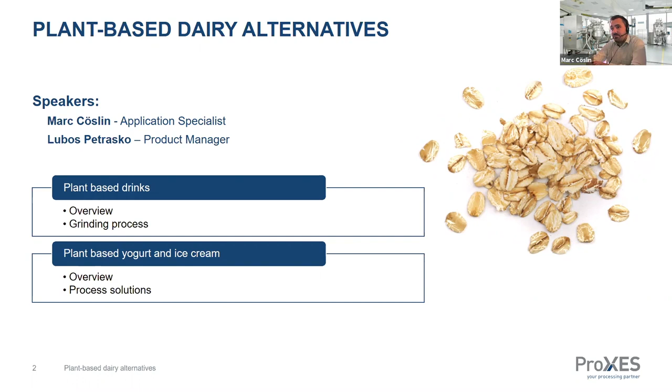Thank you, Marc. So for today we have focus on two main topics: plant-based drinks, plant-based yogurt and ice cream. We'll talk about raw materials, the difference between animal-based and plant-based products, the way the raw materials can be processed and pre-processed, what the differences between individual materials are, and what their impact on the whole process is. And then we go through more complex processes of how to produce the milk, yogurt, ice cream, and show you where our technology can support you by your products.

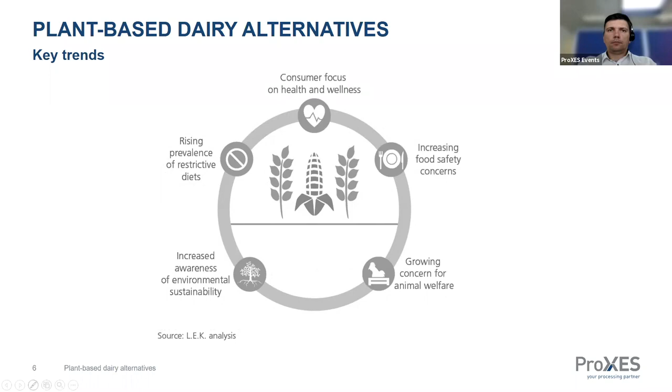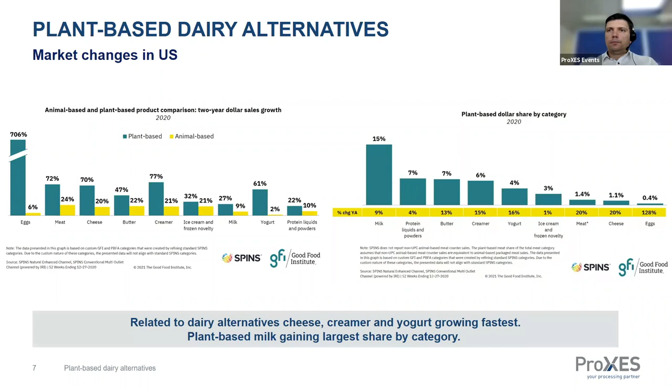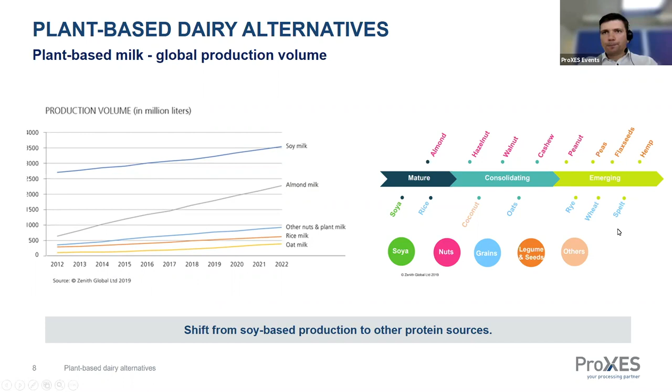So let's look at how the situation is among your customers, or based on your experience. I would like to give you the second poll question: which protein source has the highest demand in your field? You should see on your screens a choice of 10 different protein sources - feel free to take multiple, choosing as many as you consider being of highest demand.

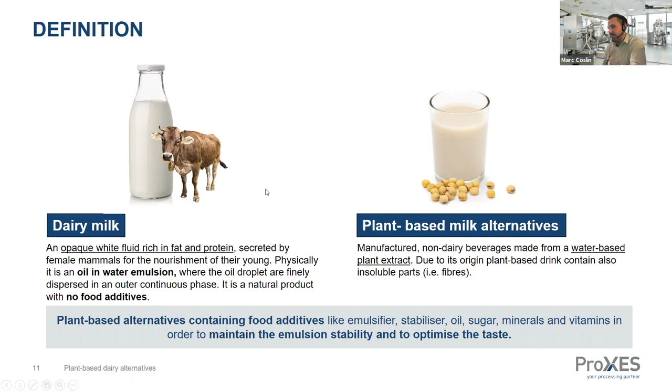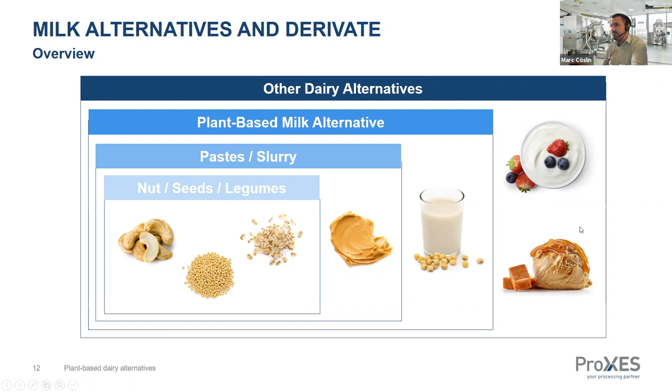Finally, there are also other dairy alternatives which are using the milk as a base in order to get a structure, as you know, like a yogurt, for example, a fermented product, or an ice cream. This my colleague Lubos Petrasko already discussed with you.

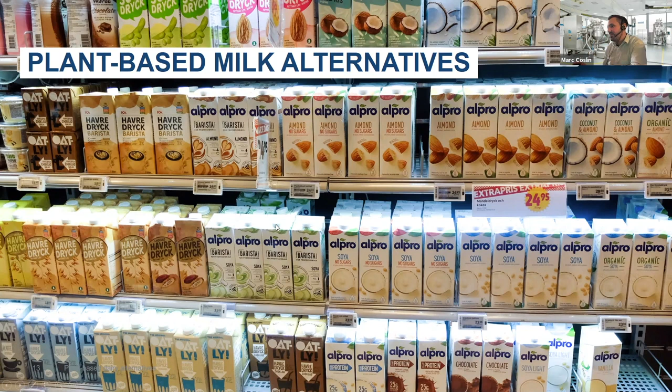So we have different brands, we have different sources - we have soy, we have almond. You can see on the right side even a mixture between coconut and almond. So there's a huge range, and it's still growing.

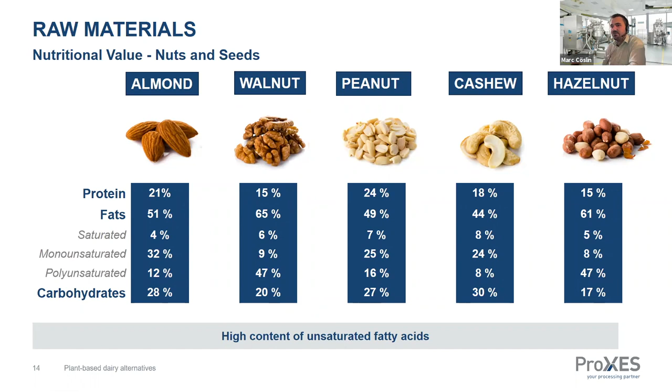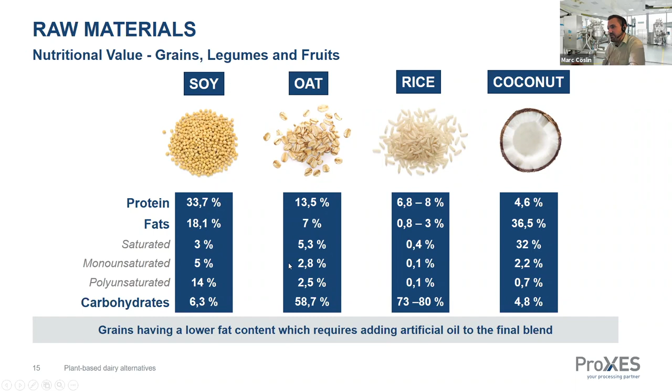And this is mainly fiber and starch, and this is also something to regard in terms of processing. We will also go later on more in detail - it's about starch network building during processing and how to avoid it.

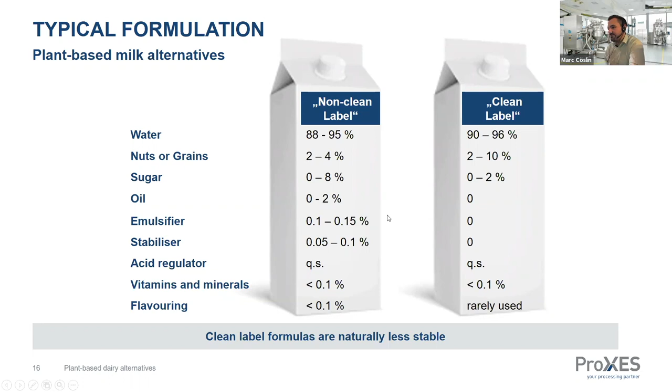formulation developer or recipe developer - we are a machine manufacturer. We can support you to find the optimum process, and these guys here can help you to develop the recipe.

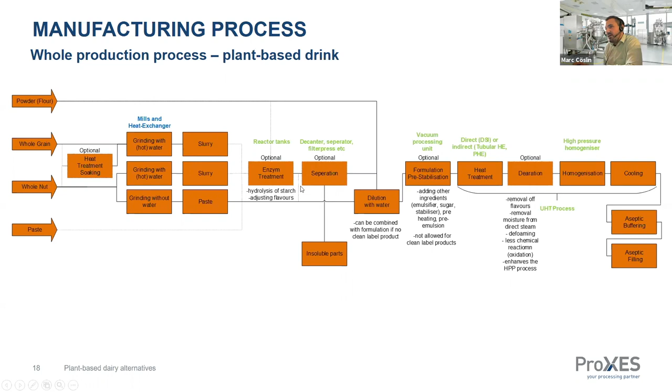We have an interesting thing, a side stream here in the soy industry called Okara. Okara consists of the fibers and insoluble parts which were not ground or did not go into solution from the slurries, but it has a quite good or substantial amount of proteins and valuable micronutrients. So it's a quite good protein source, and a lot of customers are unfortunately throwing this Okara away, while some customers use it for animal food. But there's also investigation into the need to further process it. We also experienced with some other projects that customers are willing to process this further into other sources.

Usually it will be homogenized or ground, then go through filtration steps and further drying steps, and you can create, for example, a protein powder out of it, which can be used for other alternatives or sold to other companies.

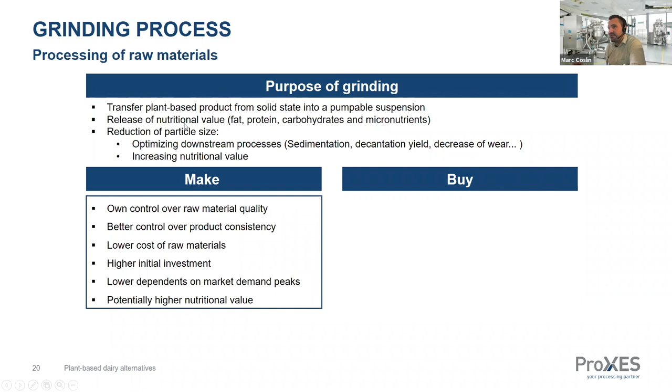The purpose of grinding is to transfer the plant-based product from solid into a pumpable suspension, and to release the nutritional values as fat, protein, and carbohydrates, and also the micronutrients. The reduction of particle size also has a significant influence on the downstream process, it can increase the decantation yield, for example. If we step one slide back, you can see in the separation you always lose some good and valuable proteins, fibers, or micronutrients. If you have an optimized grinding on this end, you would be able to have a quite valuable product and higher nutrients at the end.

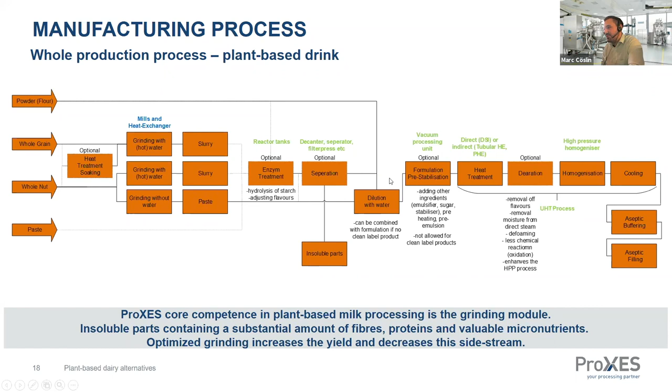For sure, there are lower costs of raw materials already mentioned. It is a higher investment for sure, since a grinding module has to be purchased. And we have a higher nutritional value compared to flour, for example, because flour is also a pre-processed powder which already experienced heat treatments. This would mean you would need to add more artificial micronutrients, for example, to your milk, instead of doing the paste from the grain or the nut.

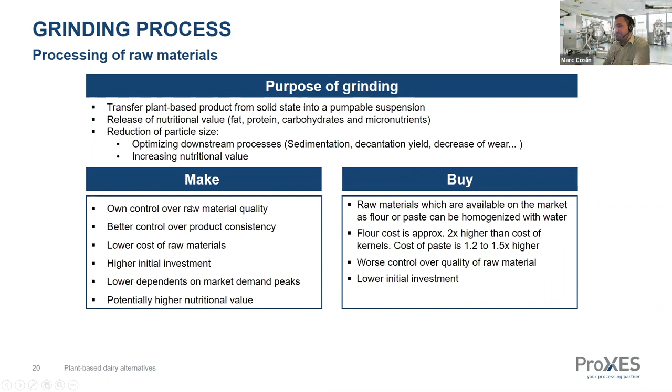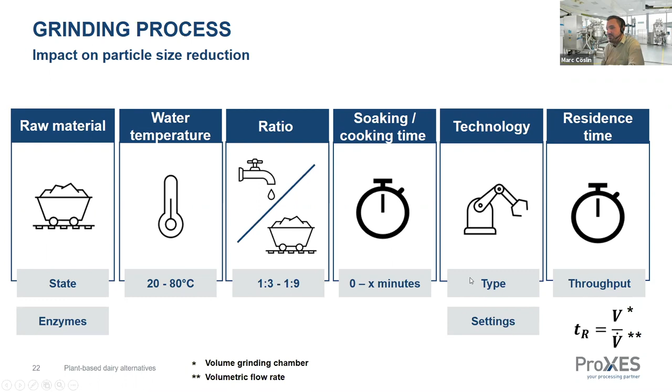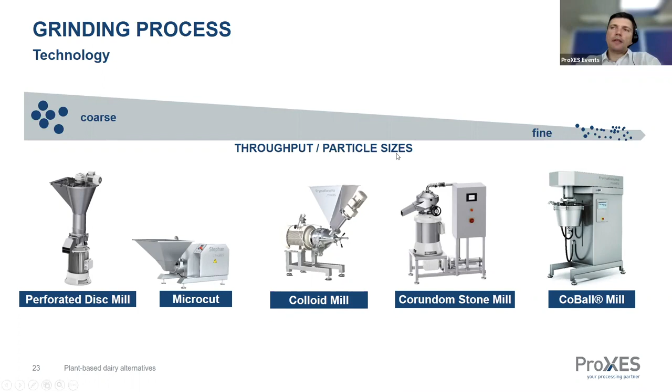By a rule, with increased reduction, the throughput of the machines goes down. That is portrayed here above each technology. So when we perform coarser grinding, the throughputs are higher, and then with reduction being stronger and leading to finer particles, the throughputs of the machines go down.

Marc mentioned the technology, so individual mills can be used in single or multiple step grinding. It's important to make the right choice in relation to application, especially which is the optimal first grinding step, optimal second grinding step, and to configure the technologies to perform at the best rate.

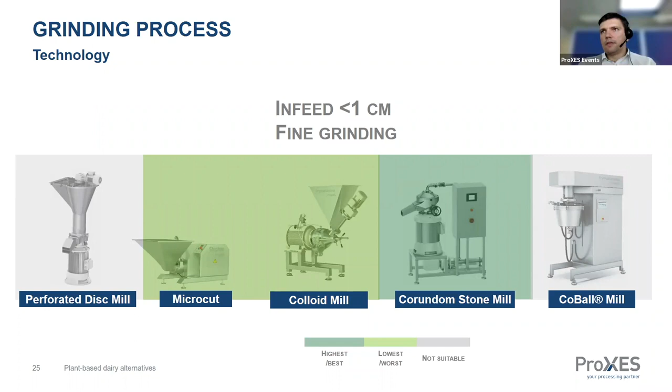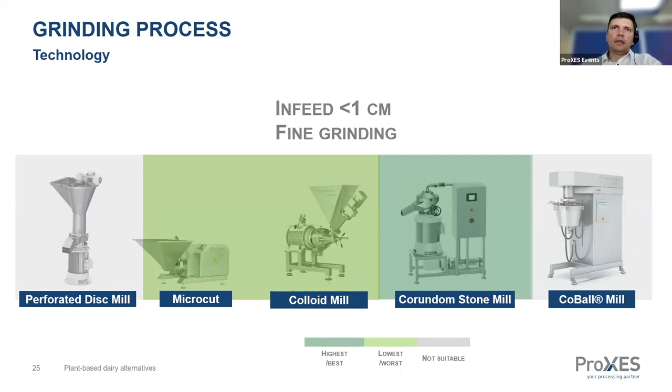The second situation is you have already pre-cut or slightly pre-processed product, which contains particles up to 1 centimeter maximum. We would refer to it as fine grinding, and for such a size, corundum stone mill can deliver the best performance. But if you already have microcut or colloid mill in the process, these 2 technologies are almost equally suitable. The bead mill, similar as before, can't handle such an initial size, and the perforated disc would not deliver optimal performance.

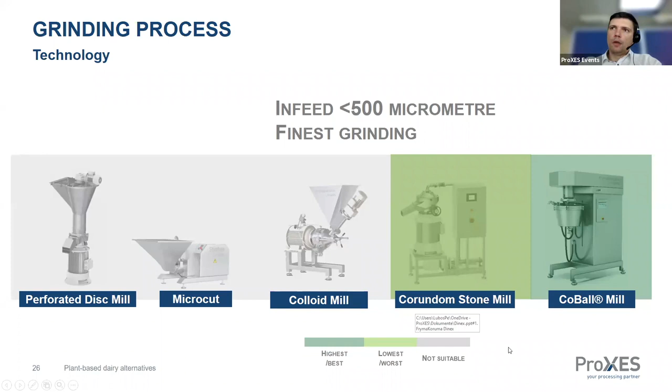To summarize this part, the choice of technology depends mainly on the application. Further factors, also mentioned by Marc, are the throughput required and the desired final particle size, which then determine which technology to go with and potentially which combinations of grinders or mills to choose.

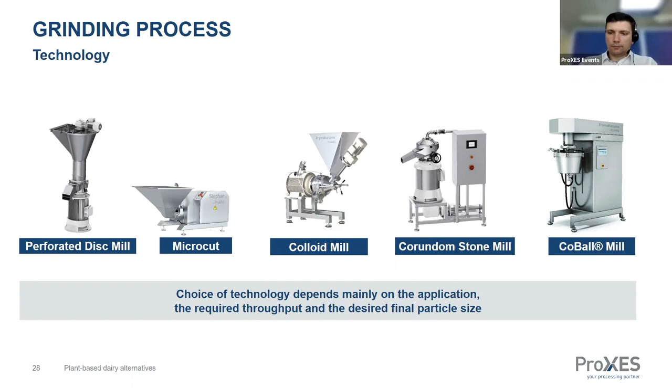As we bring a certain amount of energy into the product during milling, cooling as a downstream process can also be required to maintain a constant temperature or a certain maximum temperature of the product. In our portfolio, we have a tailored product, Terlotherm, which is a scraped surface heat exchanger. This kind of heat exchanger is the most suitable type for cooling viscous pastes. So if you are supplying or processing a paste, this technology is the one to go with.

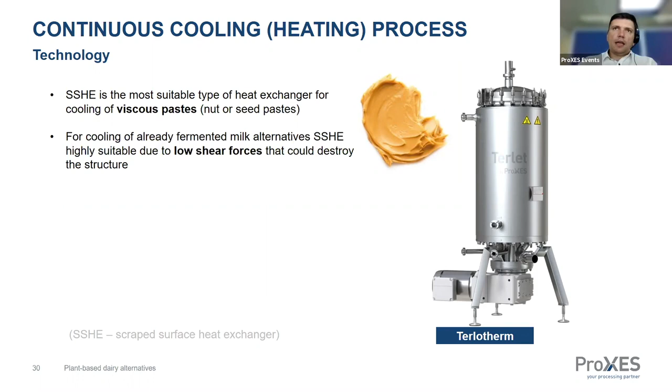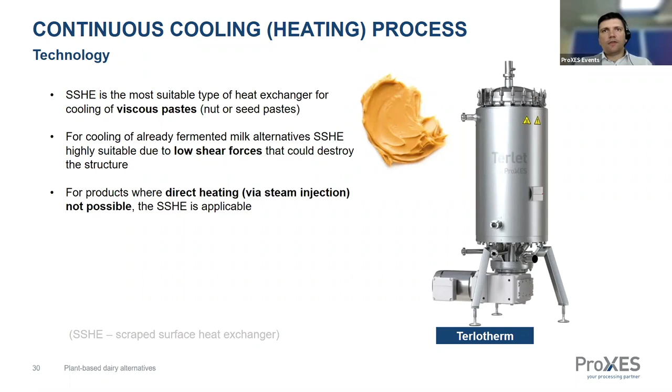So Marc, I would like to hand it back to you.

Okay, thank you, Lukasz. So now we are going a bit more into practice, and we would like to present you some best practice lines in terms of grinding these alternatives.

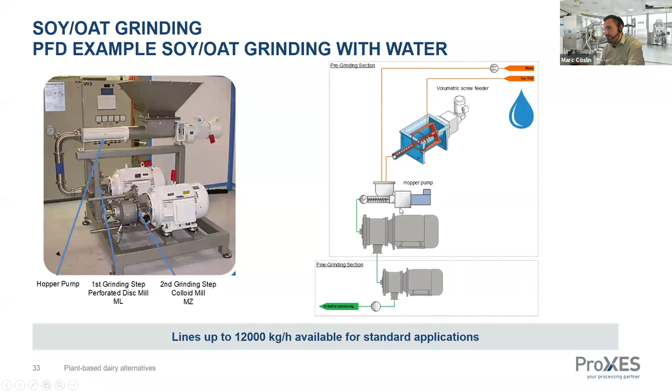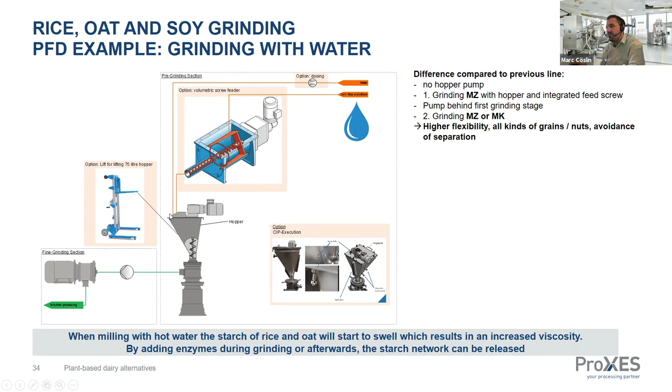What we can see here on the bottom right is a CIP execution of this hopper, so it is also cleanable in place.

Now we would like to show you a video clip related to the previous slide. It will show the multi-purpose grinding line. Be aware, there is some music on this clip - enjoy.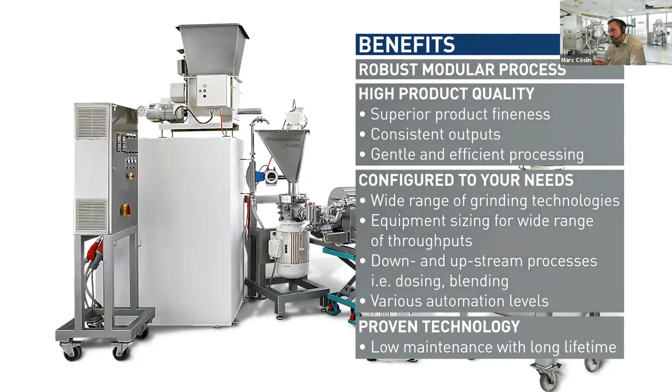Okay, this was the video clip.

On the next slides, we will talk about nuts and seeds, and also coconut. It's a surprise - it's the same execution as the multi-purpose one. As I said, this is quite a flexible execution. It is also possible to grind here different types of almond, cashews, or coconut with this one.

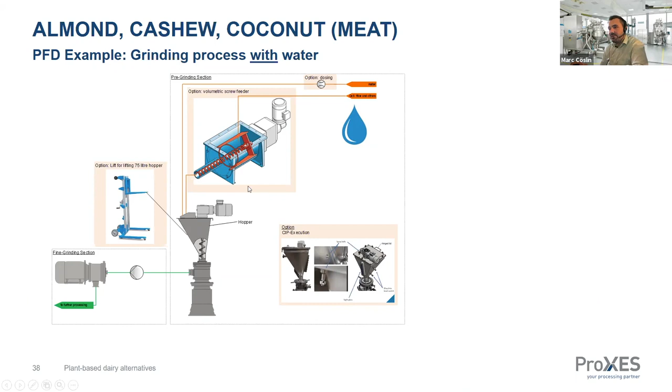I don't want to go further in detail on this slide. This is something new - I already explained that it is possible to grind nuts without the addition of water, which you can see here. On the left side you see raw material handling, which can come from a big bag station or a silo. Then we have a kind of feeder, which feeds directly into the first grinding stage.

This is usually a mill from FrymaKoruma. It can be a colloid mill, MZ, or if the particle size should be smaller, a corundum stone mill. As an alternative, it's also possible to use the Stephan Microcut. The choice of technology mainly depends on the required throughput and the final particle size desired.

Coming to the first grinding step in the mill, we would process the roasted nuts, for example, into a pumpable paste with output fineness depending on the nut and its quality, in the range of 120 to 60 microns in one passage. Then there is a buffer tank and a positive displacement pump, which pumps the product to the scraped surface heat exchanger for cooling, and then it can be stored in a buffer tank for further processing.

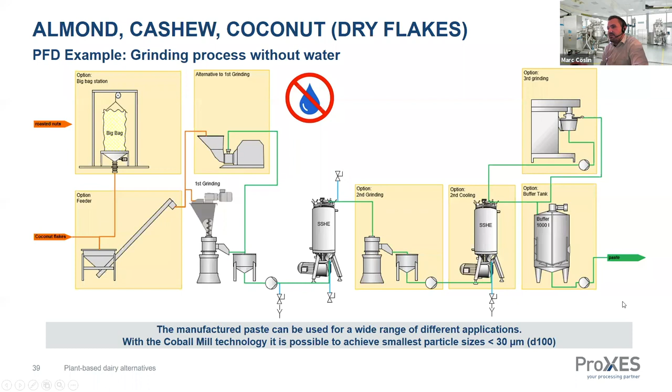Okay, the grinding without water. There's also a little video clip we would like to present to you.

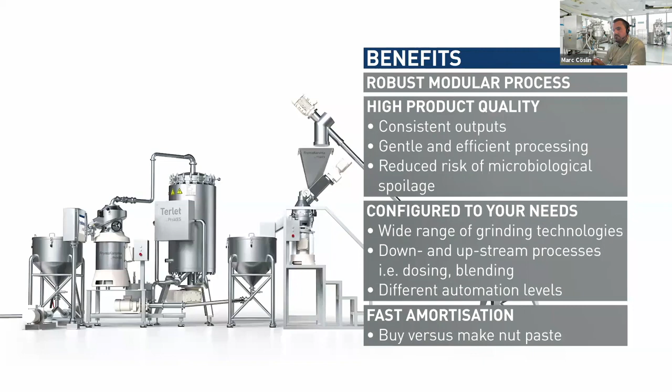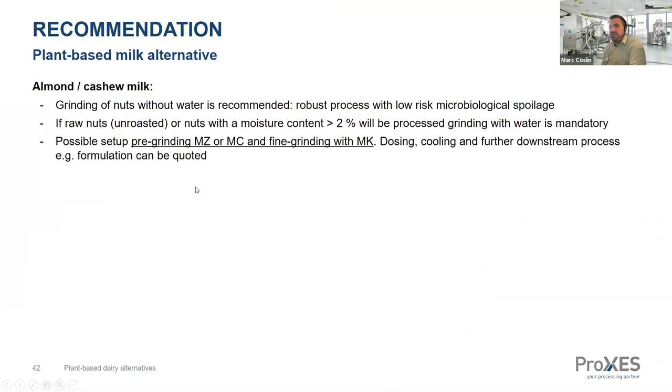Next slide is a kind of summary of the last slides, so I will just go through briefly. This I already mentioned, the nut grinding. Coconut flakes can be grinded also dry if the moisture is below 1.5%. Coconut flesh should be grinded with water. Soy milk for industrial scale, ML and MZ. For small and industrial production without CIP requirement, also other combinations are possible. And ProXES is not the partner if you want to grind rice and oats, so grains, without water. This will not work, unfortunately.

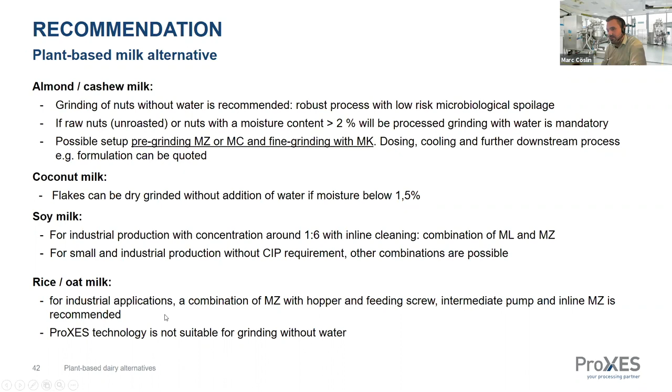Other dairy alternatives. On the next slides, we are focusing on the yogurt and ice cream alternatives. Again, we have a little definition of the two products. The classic product, dairy-based yogurt, it is usually a fermented, prepared food, fermented milk by added bacteria, mostly lactobacillus. And due to the bacteria, there is a creation of flavor and also a decrease of pH value. And due to the decrease, there is a creation of a structure coming from the proteins, the coagulum.

If you have a look at the right side, the plant-based ones, they are from different types of raw ingredients, which I already introduced you to, and they can be as well fermented by bacteria, but they will not build up this structure without adding any additives. So here again is the case, we need to add something in order to achieve the mouthfeel and the structure which is comparable to the classic product.

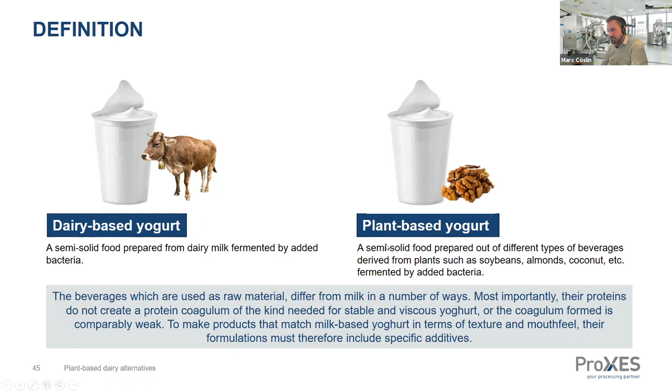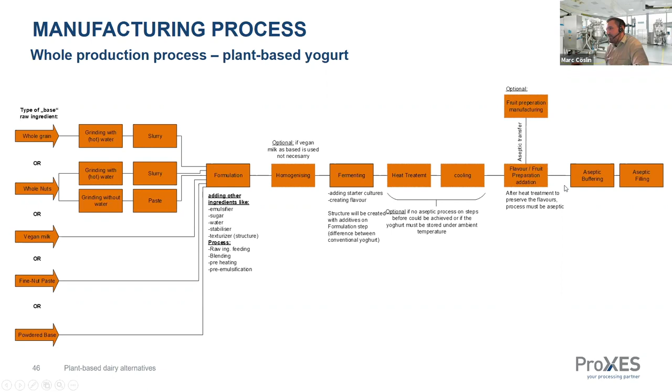Then a heat treatment will be applied, especially if the yogurt must be stored under ambient conditions, it is mandatory. And after the heat treatment, there is a quick cooling usually, and next to it, there is a further mixing step. If you want to add heat sensitive flavors, for example, or fruit preparations, you can add them there. Important is, after heat treatment, everything must be as hygienic as possible, so aseptic processing is the key word. The fruit preparation can be bought, or it can also be manufactured inside. And then there is the aseptic buffering and filling.

Talking about ice cream, we have here the dairy-based classic ice cream product, which is made out of cream as base or milk and contains various ingredients like emulsifier, water, sweetener, stabilizer. From a physical point of view, it is a three-phase system containing oil, water, and air, which is consequently frozen and stabilized. Compared to this, we have a similar definition, the same raw ingredients like from milk or from yogurt, but most common is the use of plant ingredients which already have a substantial amount of fat in order to achieve the creamy and smooth structure, similar to the classic ice cream.

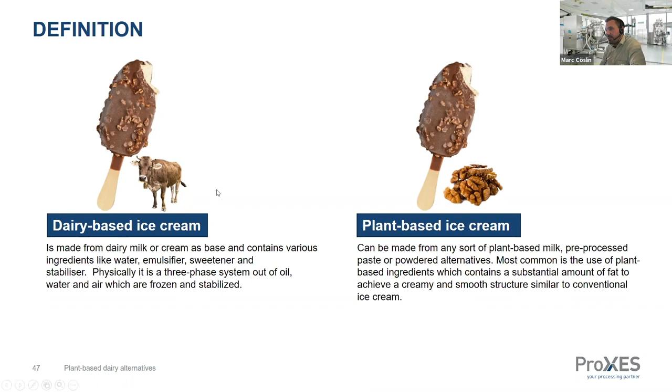This can be a production procedure. Again, we have the pre-processing of our raw ingredients or ready-to-use ingredients here, and the formulation step, similar to the yogurt process. It is a quite liquid product at this stage, as we are adding the different ingredients. Then there is a heat treatment, usually for preservation, high pressure homogenizing, cooling, and then we have the so-called ice cream base.

And optionally, for heat sensitive ingredients, or for ingredients not designed for the high pressure treatment, like particles or pieces, we have a second formulation step where we blend all these ingredients, and this has to be as hygienic as possible.

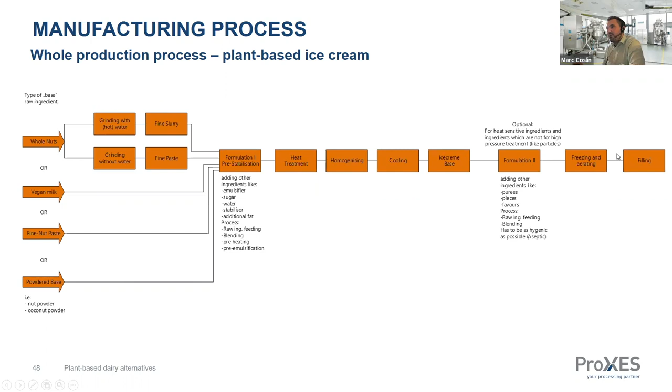This is followed by a freezing and aerating step. Usually it's a continuous freezer where continuously air will be introduced into this mass in order to increase the volume of the product, to make it a bit more fluffy and creamy. Then at the end, there's the filling procedure.

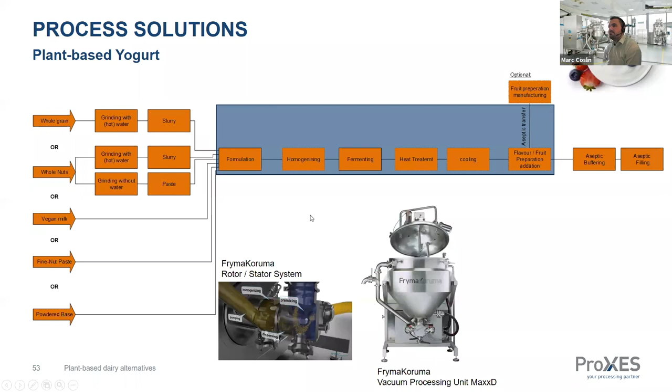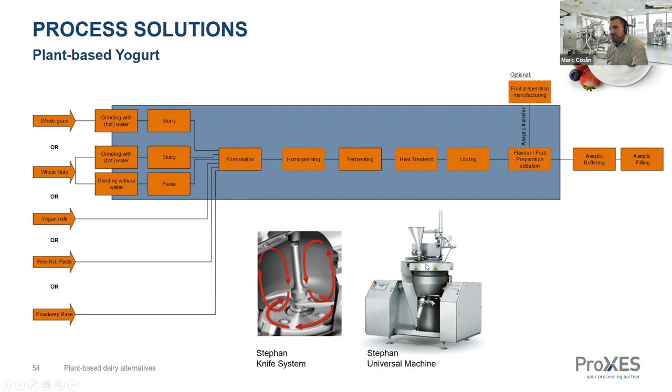If we go one step further, we have processing units where you can combine grinding and blending. This is the Stephan Universal Machine, as you can see here. It has a rotating knife which rotates up to 3000 RPM, and it can also grind nuts or grains coarsely. With this coarse grinding, you would definitely need an additional mill to achieve a finer product, but we can combine these units.

It is thinkable to have a combined process of the universal machine, for example, and the corundum stone mill, in order to get the most process steps out of the yogurt process.

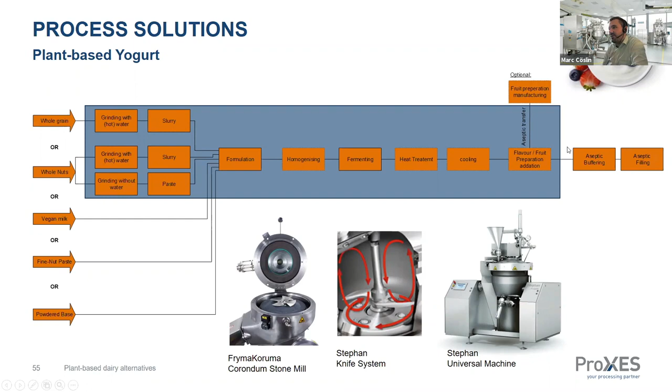Already mentioned the VMC system. It is good for manufacturing the fruit preparation due to its large heat exchange surface, the ability of adding strawberries or other frozen stuff into the mixing device. It has a rotor-stator system, which you can see here on the left side, which can finely disperse things, but it can also be bypassed if you want to preserve the strawberries, for example.

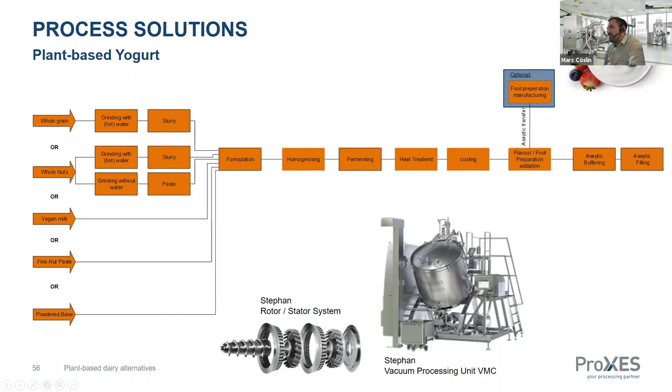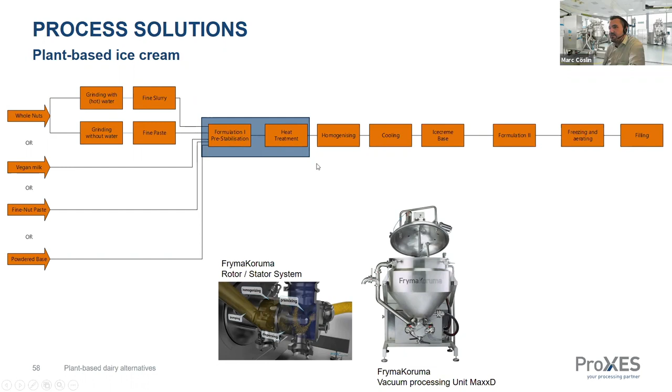And this is the same story like I already told you. The second formulation step, where you add heat-sensitive ingredients, can also be done by an inline homogenizer, which is connected to a tank.

These are just some examples. This is a modular concept of a plant-based yogurt process. What you can see in the beginning here is our vacuum processing unit MaxxD. It processes the different powders and liquids into a mixture, and it's a modular concept.

That means the fermenting is split, so we have optionally the high pressure homogenizing, and then the fermenting tanks, a buffer tank, and from there it goes through a scraped surface heat exchanger for heating, for stopping the fermentation, and to pasteurize the product to extend the shelf life, and then further to cooling, which is also realized by a scraped surface heat exchanger. As Luboš already mentioned, this heat exchanger is very gentle to the product's structure, and this is also why it is used in these kind of applications. It's a modular concept for higher throughputs.

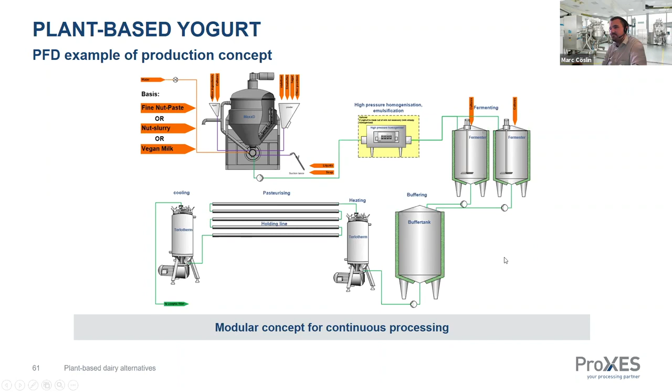Here you can see the ice cream process as an example. By adding a vacuum processing unit, it can be a MaxxD, or it can be as well a universal machine. If you want to have a pre-cut function, then it can be further processed with an MK in order to achieve finer particles. And then there is a downstream process which is not the scope of FrymaKoruma, but this is only to show what is happening. It's the pasteurization, high pressure homogenizing, and the cooling.

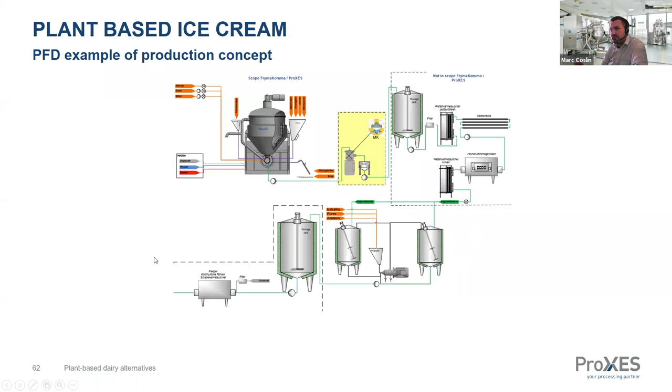For heat sensitive ingredients, it is possible to use an inline homogenizer with existing vessels and disperse the ingredients over there. At the end, we have the continuous storage tank and the continuous freezer, which is also not in the ProXES portfolio.

Okay, recommendations - I think we can make this short. For startups and small size companies, it's a good idea to start with a multi-processing unit as an all-in-one solution, or use pre-processed raw ingredients like ready-to-use milk paste or others. If the demand for the products becomes higher, you can lower the cost by processing the plant-based ingredients with grinding equipment from ProXES.

In the beginning, I made a comparison between buy and make. Gentle heat treatment with the scraped surface heat exchanger will preserve the structure in a modular process. For ice cream, it is more or less the same. I think the last point maybe is that the integration of ProXES equipment, especially mills and inline homogenizers, can allow customers who already do conventional ice cream to go also into the field of plant-based alternatives.

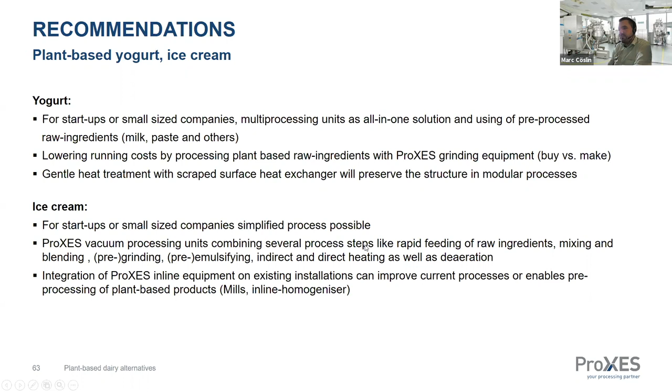You are invited to come to one of our process and technology centers for doing feasibility trials, or to visit our real-life seminars around the globe. Our headquarter in terms of technology center is ProXES Neuenburg in Germany. There we have almost the whole ProXES portfolio available for trials. You can send your raw ingredients together with your idea, and we will perform a feasibility study together with you. You will get a detailed report, recommendations, and you can test out your recipes over there and define a process.

But not only in Germany - we also have the site at Stephan in Hameln. There is mainly Stephan equipment, but we have also around the globe some other facilities like Mundelein, Illinois in the US, a technology center in Singapore, and the newest one here in Shanghai.

Yeah, I think so far that's everything from my side. Luboš, I think you can go further on with the last slide here.